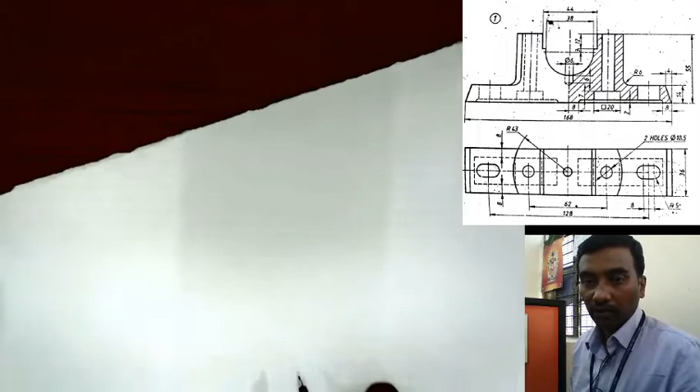This video is on assembly drawing of Plummer Block. Plummer Block is used to support bearings, and this demo covers drawing of Plummer Block parts and assembly drawing of Plummer Block.

Here I'm showing this picture of a main part of the Plummer Block, that is the body. Front view and top view of the body are shown here, with front view with right half in section, and the top view shown in this figure.

How do we do sketching of this assembly drawing? First we'll start with the question. The question is: front view with right half in section. It is not a complete section, it is front view with the right half in section, and then top view.

So it's a drawing of two views. Before you start drawing, plan how to proceed, because you will be using an A4 sheet, so this drawing should fit in the A4 sheet. Here side view is not asked, so I'm not drawing the side view.

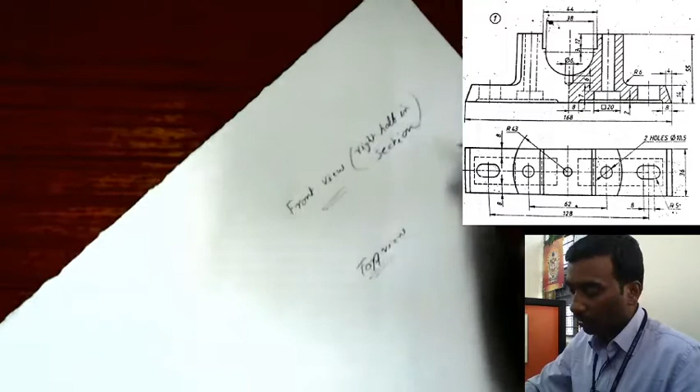If left view is asked, then you need to draw left view here. If right view is asked, then right view should come here. This is the format, so the drawing should fit in the A4 sheet.

Basically there are minimum three views that will be asked, but here for space constraint, I'm doing only these two: front view and top view. These two views will fit into the drawing sheet.

This is the sheet that you will be using. Front view and top view should come here, front view above and top view below the front view. So don't draw top view on the next page or like that. Please don't do that, because you need to follow the standard.

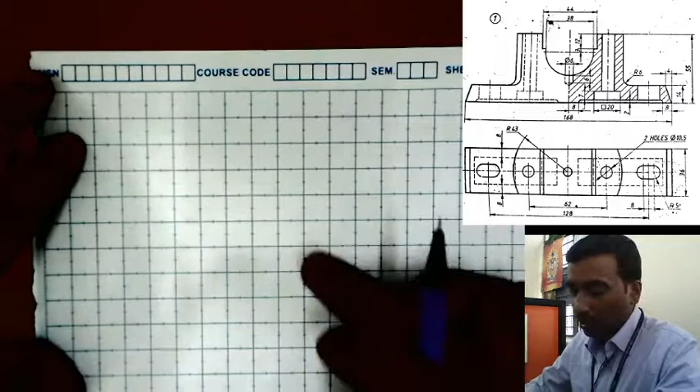This is orthographic projection. Front view, below front view is top view, and next to the front view should be the side view. So front view here, top view should come exactly below this, and side view on any of the sides.

If it comes here, then it will be left view, so right view should come here. This is the template, and you should follow this, the method of orthographic projection.

Here it is first angle projection, that's why top view comes here and the front view comes here. If it is third angle projection, then top view here, and below top view the front view. Here we are following first angle projection, so front view and the top view.

I need this much space, so please plan for the space so that it can be accommodated in the drawing sheet, and then proceed. I will leave this much space for front view, and the bottom portion of the sheet is for top view. What is the size of the complete assembly?

Complete assembly will be around 80 to 90 mm, so I can leave this much space, and width is around 170 mm, so 170 I can accommodate here. This drawing sheet's width is 180, so I can accommodate.

So top view here, and front view will come here. I will start with front view, front view with right half in section. This is the XY line. Or we can do like this also, that's also possible if the space is sufficient.

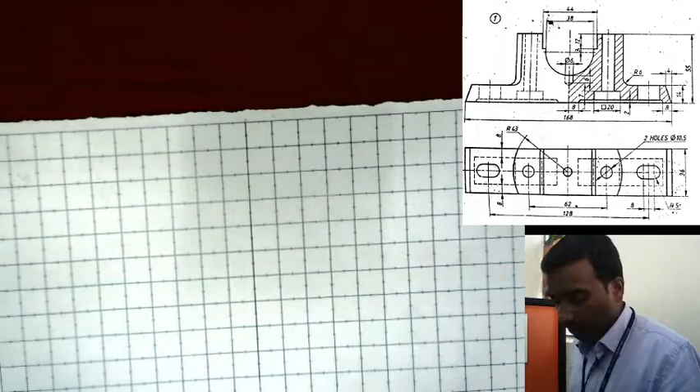The width is 40 mm, and this is okay, so let's do like this. Landscape orientation is also possible, because if side view is asked, then you should know how to draw the side view also - front view, top view, and side view.

I need this width of 170 mm, so I will take up to here. This is the XY line and baseline for the front view. So the thickness here is 14 mm.

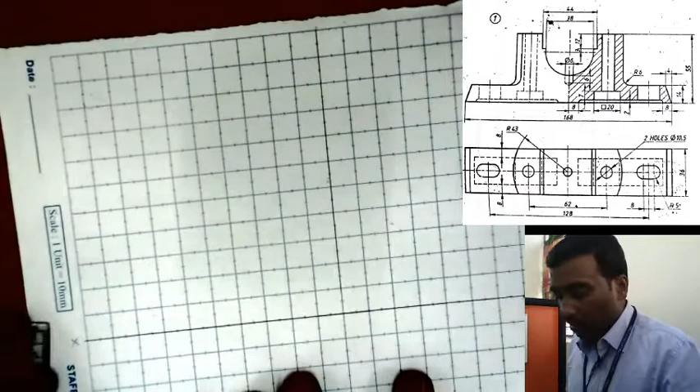I'm drawing to 1:1 scale, so whatever the dimension, I will take the same dimension. I will not reduce the dimension. It is 1:1 scale, so here it is 14 mm thickness, I take 14 mm.

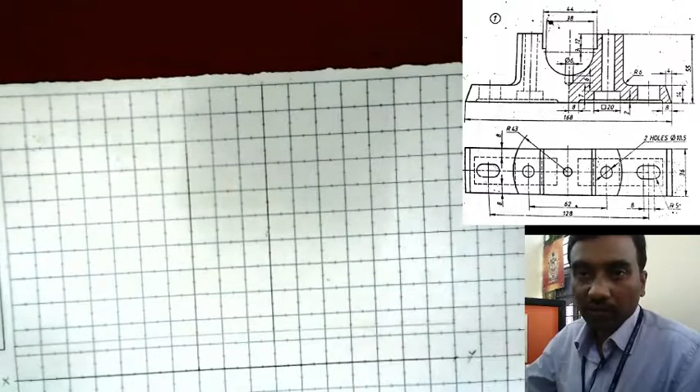Height is 55 mm, measuring 55 mm from the bottom line. So from here it is 55, so it comes here. So I will draw the arc. Instead of the radius, the diameter is given, diameter is 38, that means 19 mm, so radius is 19 mm. So this is the center.

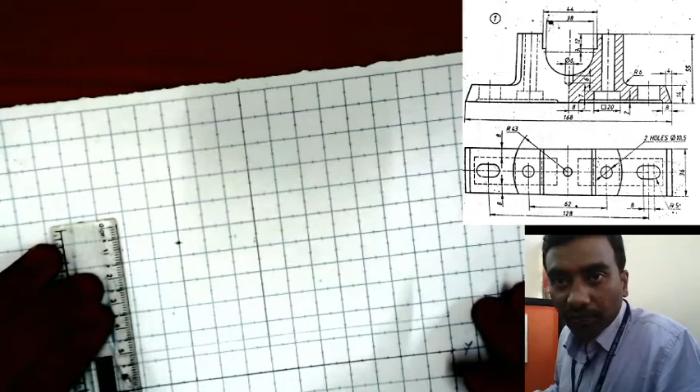Sorry, the height is 55. So this height is 55, from there I need to draw. I will take this reference, it is 22 on either side, and vertical height is 12 mm.

And then this is 38. 44 minus 38 is 6 mm, so this distance will be 3 mm. So total difference is 6, so on either side if I take, then it will be 3 mm. So it is 3 mm, 1, 2, 3. So on this side also is 3.

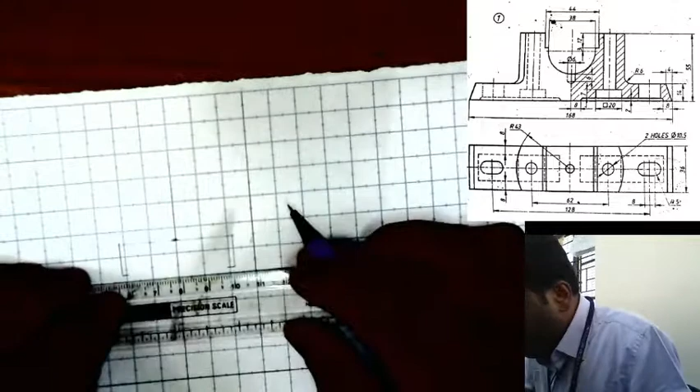So diameter is 38. Again I need to take 3 mm down, the distance of 3 mm from here. From here it is 19 mm.

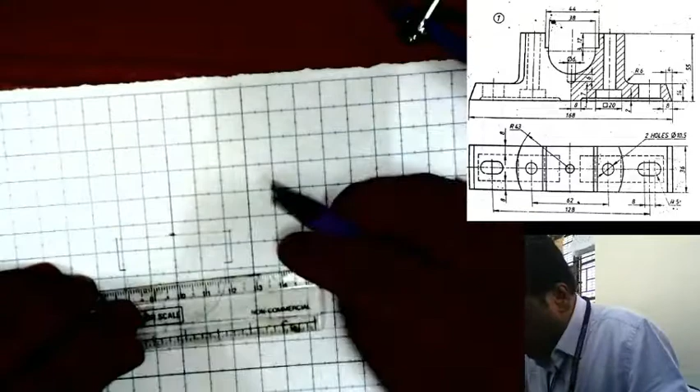Then a straight line connecting these points. So it is like this. I will make this arc darker.

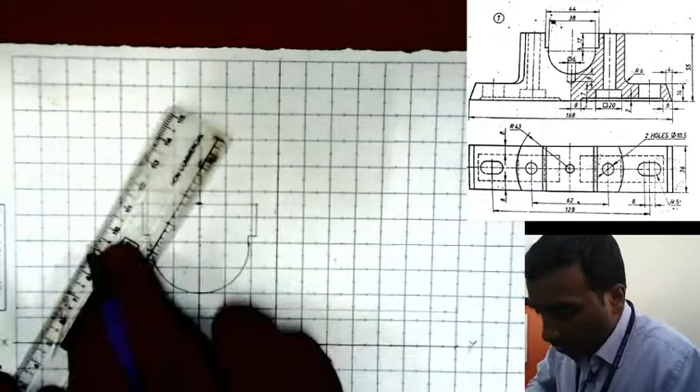So now at the end it is 4 mm from the top on either side. So taking 4 mm length on this side and also on this side, 4 mm, and join these two points.

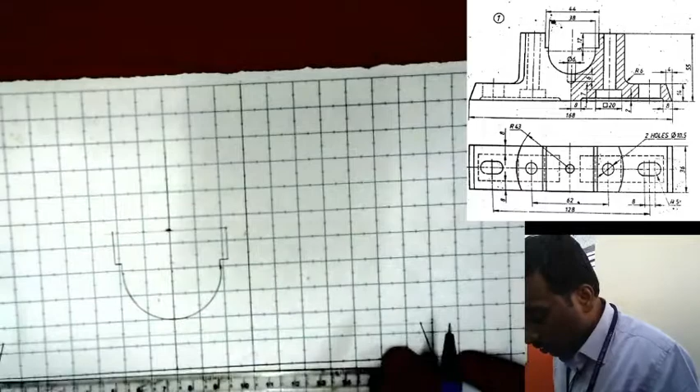So here it is going a little outside, so take care. It's okay, it's because it's difficult to complete in an A4 sheet. So total length is 168, so it is 84 from here, 84 mm here.

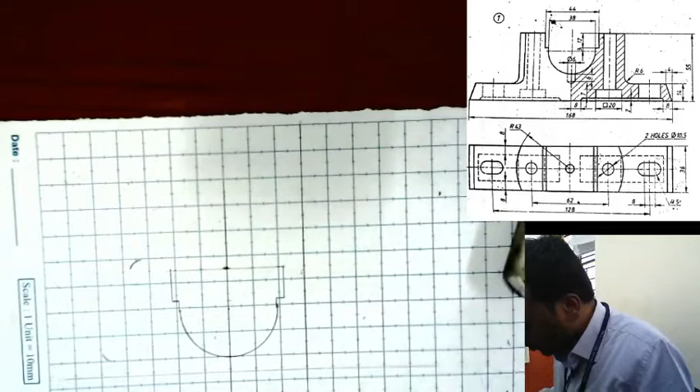So I will draw a vertical line, and from there it is 4 mm. So it is this line, and then from center it is 84 mm. So from top I will extend up to this, and from here I will take 4 mm.

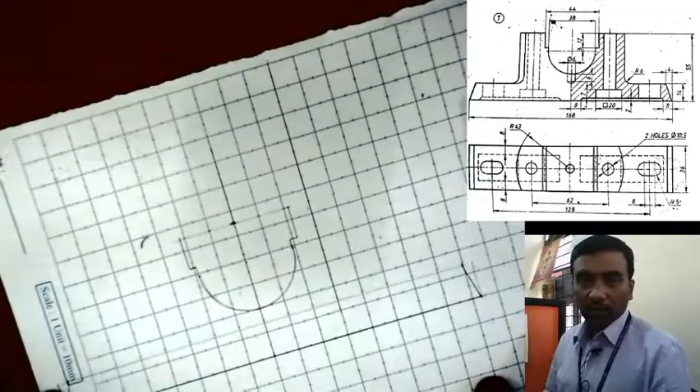So actually in the beginning I considered this distance as 170. So that's not correct, actually it is 168. And also, while taking dimension, I made a mistake here. Please correct, because this is a center line. From here, I need to take half, exactly half of 168 is 84, and 84 from this reference line. On this side it is 84, on this side it is 84. Okay.

So height is 14 mm, so height is 14, that is correct. So now I will take these dimensions from the top as a reference, because this is the reference line, I will take reference from here. So what is the distance from here to this last line? It is not given in the front view, it is given in the top view.

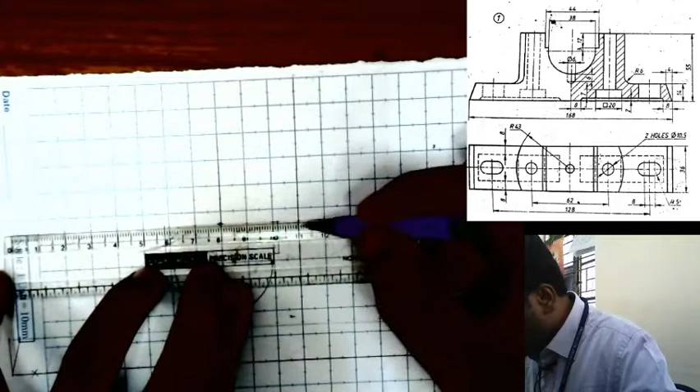So in the top view you can see that radius is 43, so it's an arc of radius 43 in the top view. So therefore this distance from here is 43, 10, 20, 30, 40, 43 is to here. From the center, it is to a length of 43, okay, 10, 20, 30, 40, 43 up to here.

And then from here I will draw a vertical line. Then I will make this dark, and then from here it is dark like this.

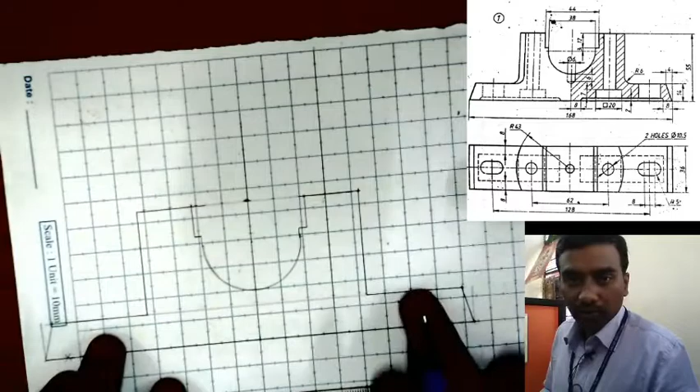Next, taking reference for the holes here, so that it is of width 10 mm and semicircular on either side. So it is at a distance of 128, that is, from the center it is 64. So I will measure the distance from here. It is 64, and again on this side it is 64, like this. So this is the axis for the hole, and here also axis for the hole is.

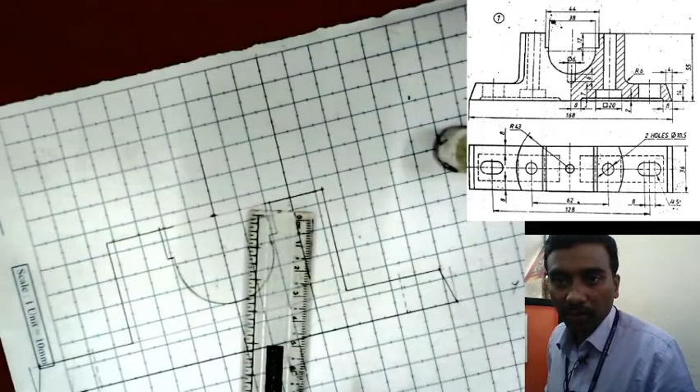The total width of the hole is 8 plus 10 mm, that is 5 on either side because of the arc, and 8 mm, so it is 10 plus 8, 18 mm. So I need to mark 9 mm on either side, so 9 mm here and 9 mm here.

So here I will show with the dotted line, because it is not visible. But here it is visible, because I'm showing from this side it is with section, so it is visible on this side. So 9 mm on either side, so 9 mm and 9 mm here.

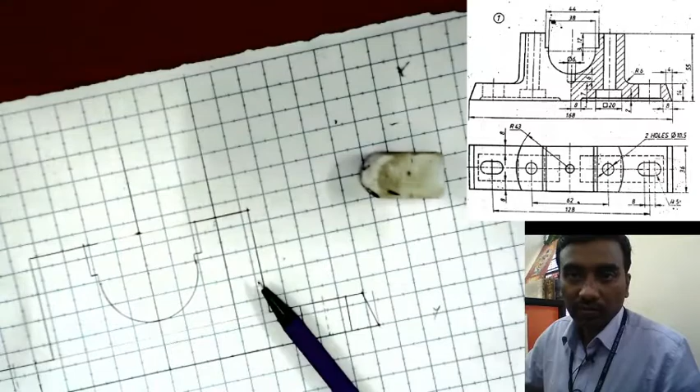But it is not complete. The vertical line below that is a slot. So a slot of, sorry not 7 mm, it is 2 mm. It's a 2 mm slot in the bottom face.

So on this side it is not visible because here I'm not showing section, so I have to show with the dotted line. So on this side I can show like this because it is a visible section view. Okay, so again here it is not complete throughout the section, and it is a distance of 8 mm.

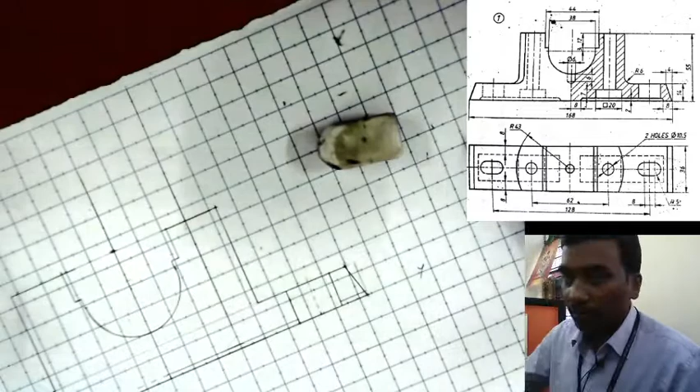So there is 8 mm from here, so 8 mm from bottom, 8 mm measuring from the bottom, okay, so 8 mm, here it is up to, okay, from the center also 8 mm.

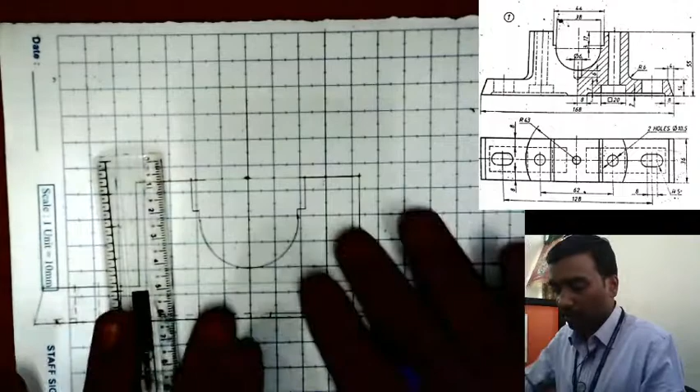So the view is like this. Since we are showing the front view with right half in section, this portion should come in section. This is without section. So right half in section, the right side of the observer - this is the right side. So right half in section, this portion I have to show in section.

So I need to show the inner details of the part on this side. There is space for a bolt here, which is at a distance of 31 mm from the center. So measuring 31 mm.

So the 31 mm here, I will draw the axis. This is the axis for the bolt hole, and then it is a square head bolt hole. So there is a square hole here, whose height is 7 mm, and its width is 20. That means from here it is 10 mm like this.

So I need not draw the dotted hole because this is visible. So it is like this.

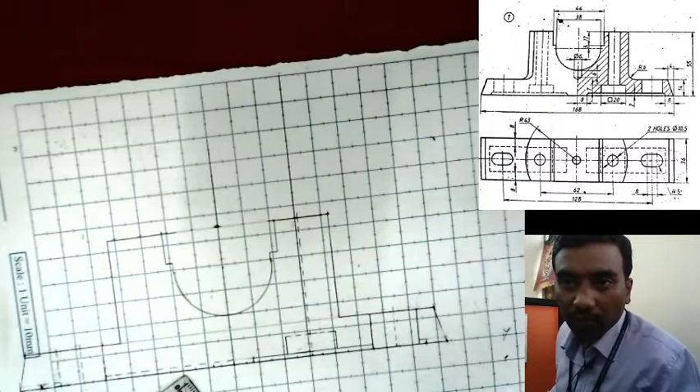The diameter of the bolt is 10.5 mm, so from here it is 5 mm on either side. I can't measure 0.5 mm, so I'm taking 10 mm. In software, you can draw actually the 10.5 diameter of the hole, but here the least count is 1 mm, so it is not possible.

I will make it approximate to 10 mm. So this is the space for the bolt. The bolt will come here. So it is like this. So try to draw exactly as it is, as per the dimension.

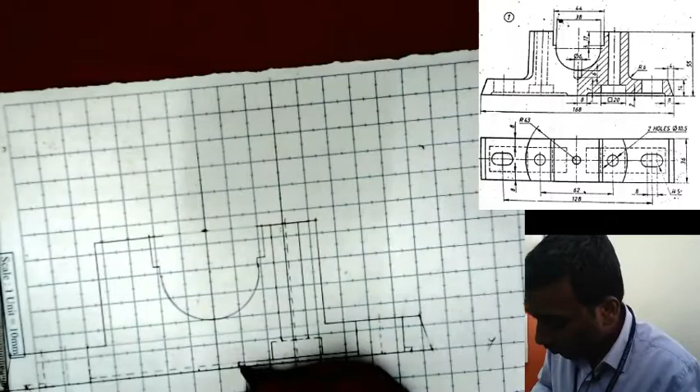It is mentioned that wherever the radius is not specified, unless otherwise specified, the radius is 1 mm, that is mentioned in the drawing. Also, these minute details you can just make it like this. So this is not actually completed, but major part of the body is completed here.

Now I need to assemble. Before that, let me draw this hole also. Diameter is 6 mm, so it is 3 mm and 3 mm, with a depth of 6 mm.

So here I will draw two dotted lines. Here I will show the continuous line for 6 mm, and then select this.

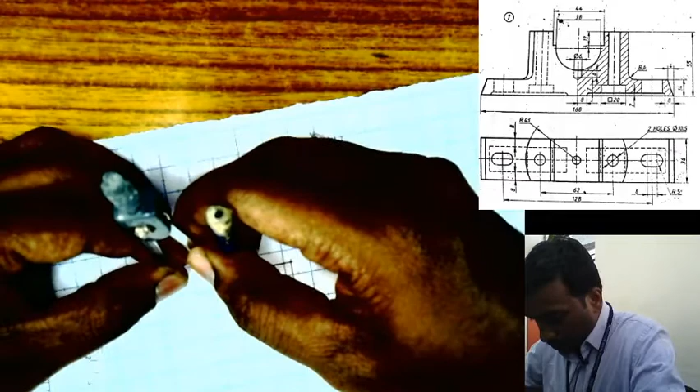The same - there is symmetry about this axis, so I will take this dimension on this side and this dimension on this side. So this is for the axis, and this is for the bolt.

This is the square head of the bolt.

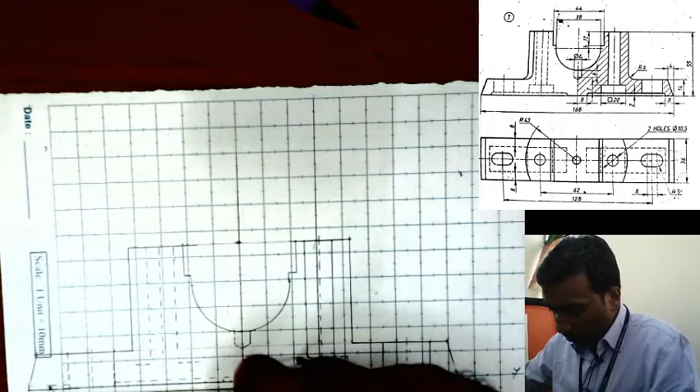I'll take measurement from here. This way we can save time. Since it is symmetry about this axis, I can just measure and copy this dimension on this side, so we can save time.

So now part number 2, I will add that image.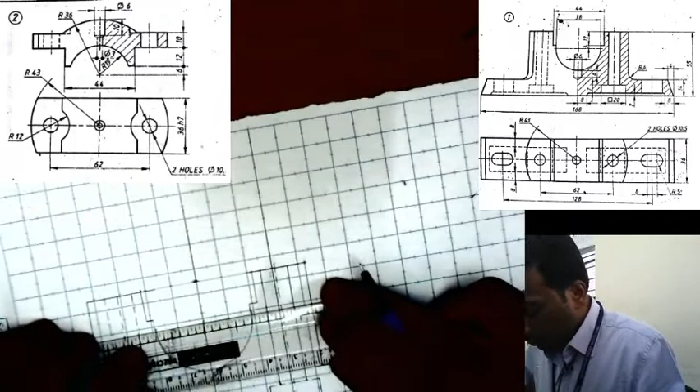So now the cap - the center is actually the same as the center of the body, they should coincide. From here, the radius is 19, so I will draw an arc of radius 19.

So this is just for reference, but actually the bearing bottom half and bearing top half will cover this portion.

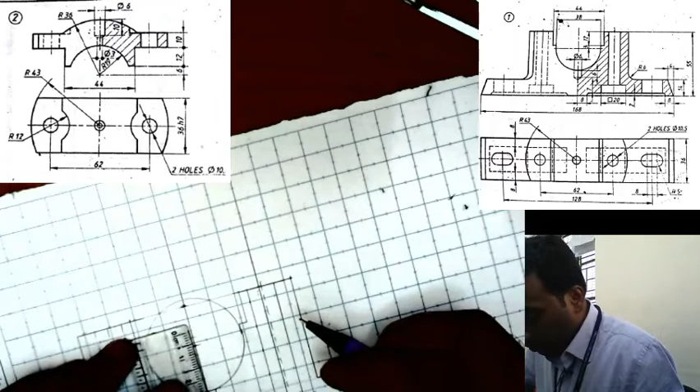So now from the center, I have to take a distance, height of 6 mm. From here, the height is up to here.

Forty-four is the width, so I'll take 22, which will touch this much portion. And then this vertical distance is 12 mm, from here it is 12 mm distance. So like this.

And then from there, it is to a distance of 43, which means it is up to this line. And then 10 mm from here.

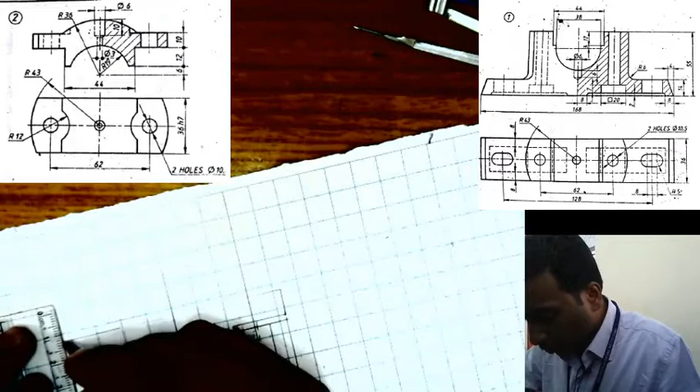So like this. So one more arc of radius 36.

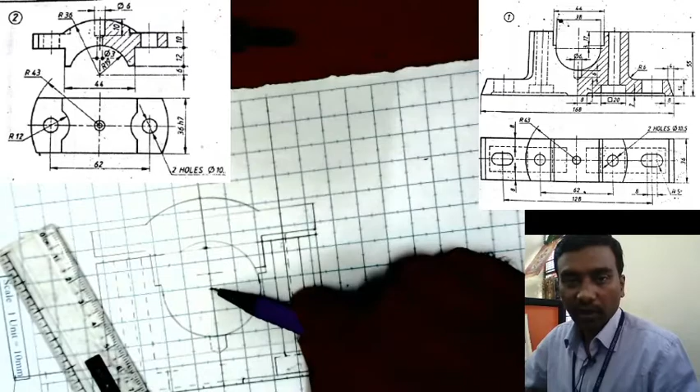Remember, the constraint here is this is the body and this is the cap. After the body, the bearing bottom half will be inserted, then the shaft will come, then bearing top half, and then the cap. Since I am getting the reference as the center of the body and center of the cap, I'm just taking that reference and inserting the cap. In actual procedure, they will insert the bearing bottom half on the body aligned with this axis, then the shaft, then bearing top half, and then the cap will be inserted.

So now take the projection. I will complete this part. Just a minute.

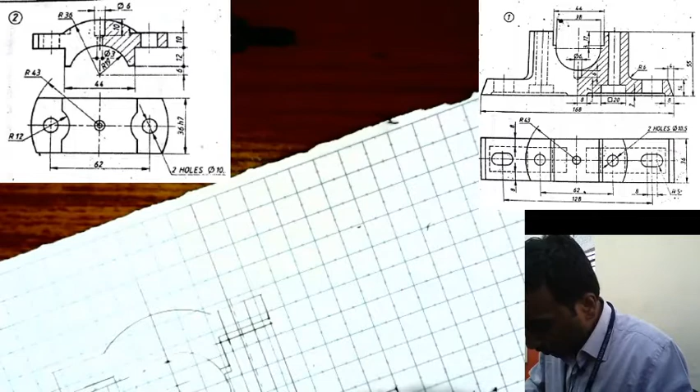So the axis, here this hole is also visible. That bolt will come here. I will just extend this because it is the bolt. This is the bolt, so I will show the bolt head. This will become a continuous line, this also becomes a continuous line, and then I can erase this. No, this is not required because the bolt view comes here. So it is like this.

So length of the bolt is... length of the bolt, I will add that image.

So length of the bolt is 75 mm. Shank length is 75 mm, it's measured from here. It should be 75. I think it is 75. It seems to be 75. Okay, 75 mm comes up to here.

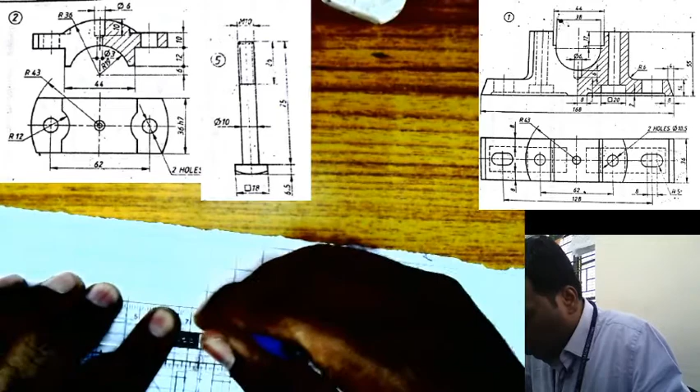So two nuts will come here to clamp this assembly. Two bolts and four nuts.

Similarly here I will show the bolt. So bolt is visible in this gap, and it is up to this length.

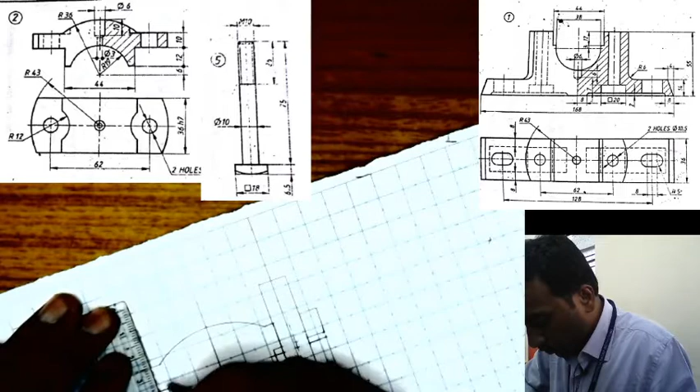Now I will take this bearing bottom half. Before that, let me draw these oil holes. It is at the center, and diameter is 6 mm, so from here 3 mm on either side, to a depth of 10 mm. And then the diameter is reduced to 3 mm, so 1.5 on either side.

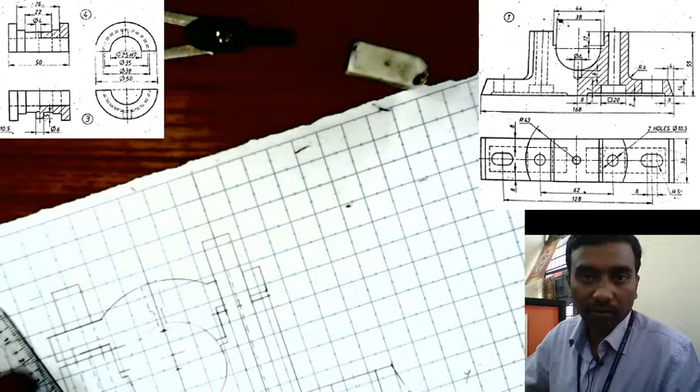Now I will include the bearing bottom half and top half. Here it will be seen as this circle. The diameter of the circle is 50 mm, which coincides with the axis of this bearing bottom half and top half, it coincides with this center. So it is 25 mm is the radius.

Taking the radius here, I will draw a horizontal line for reference, and then comes 38 mm, which is already there. Okay, and then one more arc of 35, that is 17.5.

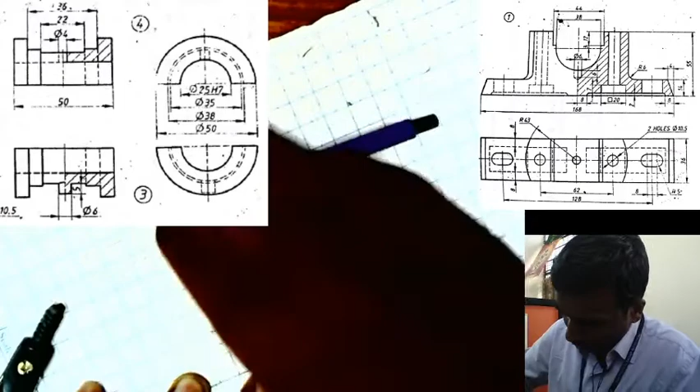So now the next part is the shaft, so I need to know the diameter of the shaft and nut. So it is 25 mm, diameter of the shaft is 25 mm. Just take 12.5.

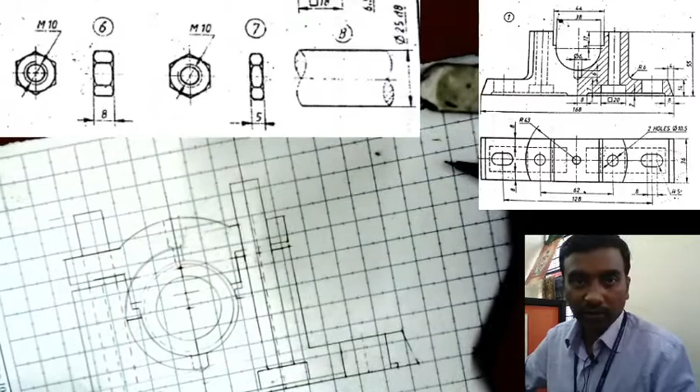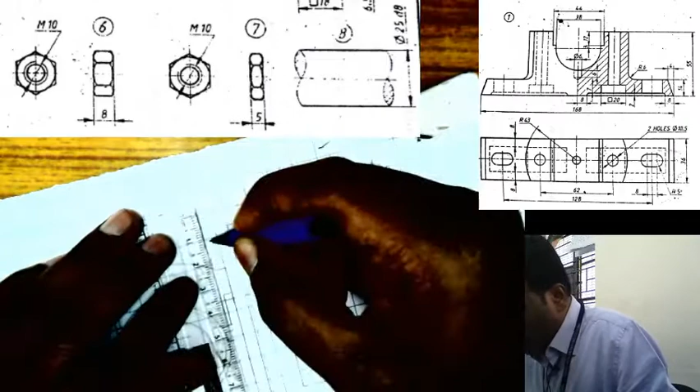Now the nut and lock nut. The small one's thickness is 5 mm, is 5 mm is the thickness, we'll take thickness is... then the bigger one is of thickness 8 mm.

So it is, show the chamfers. Actually you should follow the procedure given in the nut and bolt chapter to draw this, but here, because of time constraint, you can show like this.

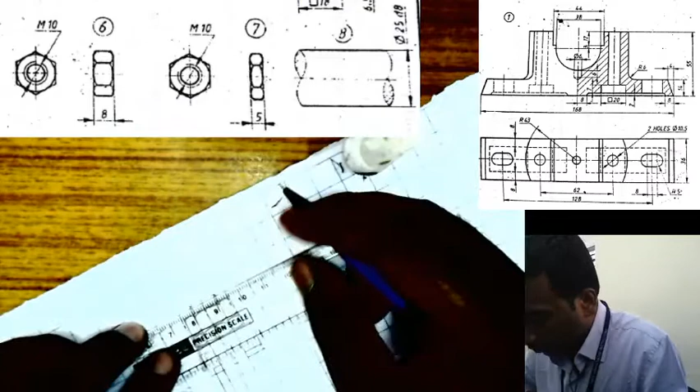Show threadings because this portion is threaded, so show threadings here with the chamfer, and here also with the threading and chamfer. I will draw this first, 5 mm and then for 8 mm.

So for details about the nut, please refer to the nut and bolt chapter. There you will get the actual procedure to draw the views of the nut and bolt.

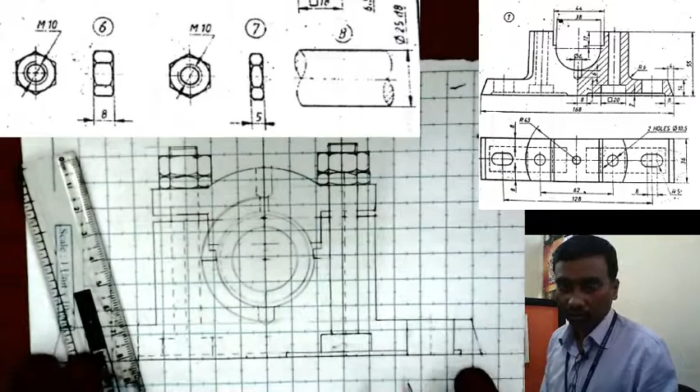Since the right side is the sectional view, you should show the section. So for the section view, you should draw the lines showing the section. It should be at 45 degrees, like this. You need to fill this area which represents the section.

Don't hatch the nut and bolt. This I should not hatch.

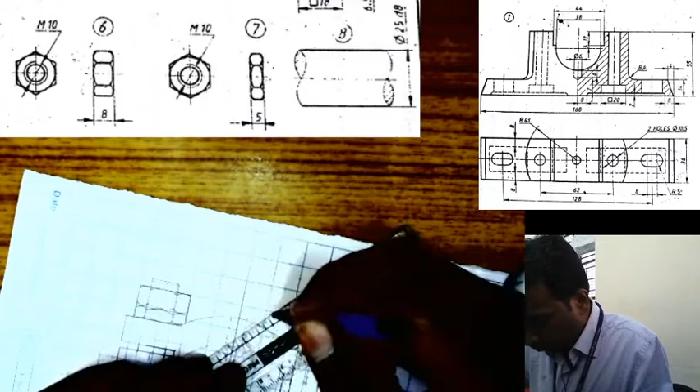Hatching style should not be the same for these two, they are different parts. So hatching style here I'm showing like this, but for this it should differ because these two are different parts.

So this is actually the major part of the front view completed here, and I will not go further because you can complete that remaining part. Ballooning, showing major dimensions, other things, you please do it.

Now the top view of this assembly, so the top view of the assembly is like this here. So the total distance, this 36 is the width of the... 36 mm, so I will take 36 mm.

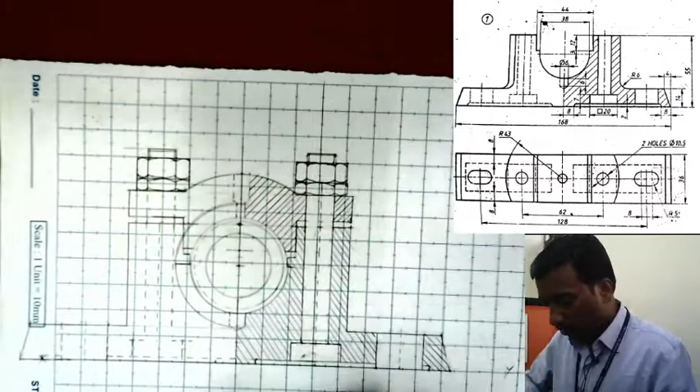This is the reference line. So for the top view we'll take projection from here, from these two ends, like this. So width is 36, 18 mm on either side, and 18 mm on this side.

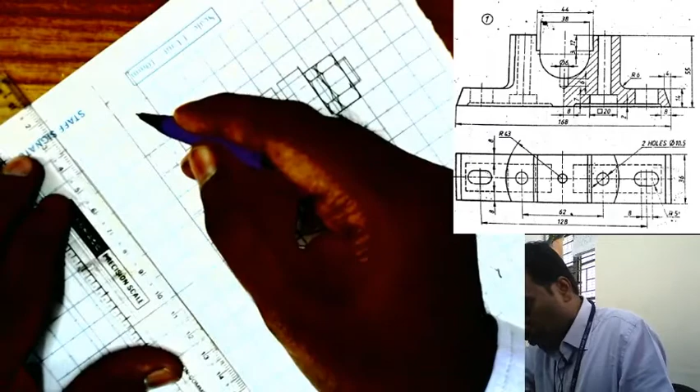So center is this portion here. From there I will need to take the arc of radius 43. We'll draw this arc on this side, similarly an arc on this side.

Now I'll take the projection of this to the front view, and here I need to show the dotted line. And then an arc will come here of radius 6. For that, use pro circle, use pro circle and draw the arcs, this arc.

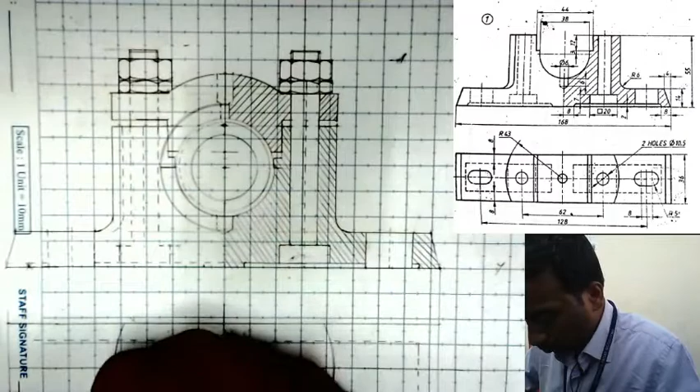So then the bolt and nut. Please use Pro Circle for these small curves and circles, because it takes too much time if you want to do it by using a compass. Also, you will not get a good curve because it's a small curve, so you can use Pro Circles.

So this is the top view of the bolt, and for the nut, top view of the nut, and then on this side.

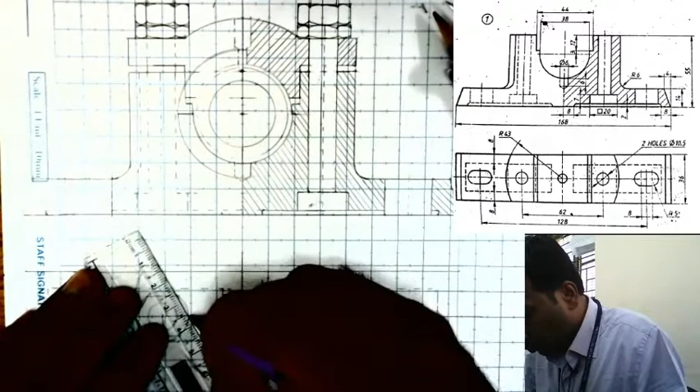So show the top view of the nuts like this. Here comes after this, the top view of the cap. So top view of the cap is like this. It coincides with this line, so it will overlap on this edge. It's okay, but the oil hole will come here. We need to show the oil holes here. Please use Pro Circle.

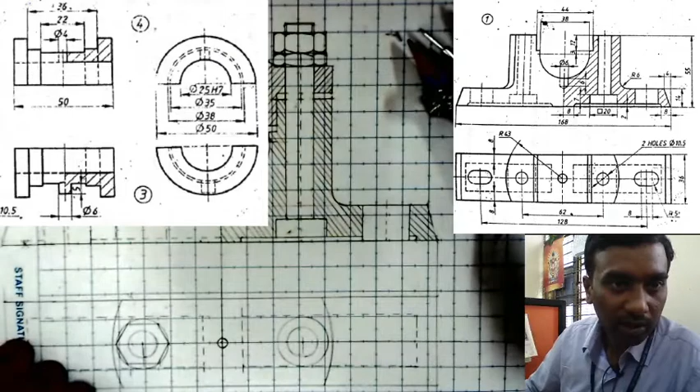So bearing top half and bearing bottom half, this will fit here, 36 mm will fit here. The remaining will project out, and its distance is 50 minus 36 is 14, and 7 mm outside. We will take this projection outside. It projects out by 7 mm on this side, on either side it is 7 mm. So here it measures 7 mm outside, 7 mm here and 7 mm.

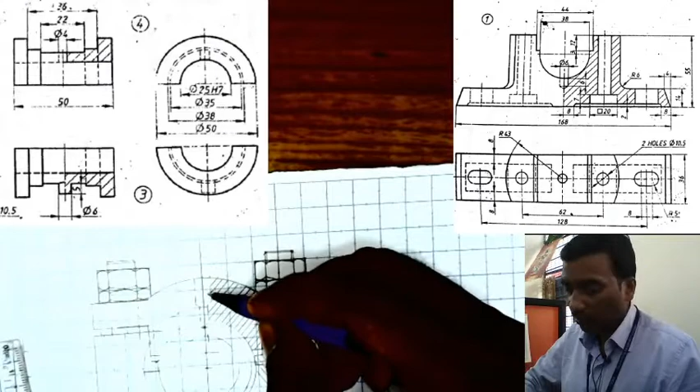So like this, then the shaft will project out. I mean, it is the support for the shaft. So this is a bearing and it supports the shaft. Bearing bottom half and bearing top half will hold the shaft in position, and with the cap the entire assembly is held by the bolts, by clamping them. And this way, this is for oil holes, so with this oil will flow and provide lubrication for the smooth rotation of the shaft.

So this is what completes this. So shaft, bearing bottom half, top half, and the cap, and the entire assembly like this. I have not drawn this view, please draw it, it is just like this. So like this it comes here.

And if the side view is to be drawn, then we need to take the projection here. So I will draw the reference lines for the side view. This is the intersection point of the XY line. From here I will draw a 45-degree line. So now you need to take the projection of this. The side view should come here. So this is the left view, because I'm the observer.

I'm looking at this drawing from this end. So this is the left side of the observer. This will be the left side of the observer. So if you're viewing in this direction, the view will come here, so the view is the left view. So take the projection of this, and projection of this, taking projection here.

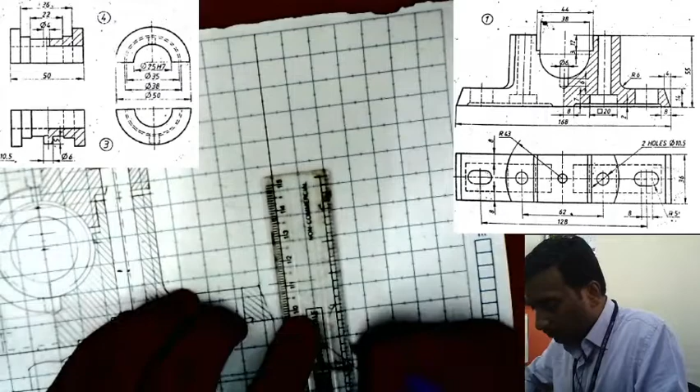We can take the projection of the front view and projection from the top view and complete the side view here. So, left view, this is the procedure.

So front view, the front view will be like this, it will be front view with the right half in section. Take care about this gap here and also this gap. If you maintain proper dimensions, then you will get this gap.

Similarly, this top view, so the top view is a bit easier. You need to show the bearing, the projection of the bearing top half and bottom half, and the shaft. And then the section view is also important here.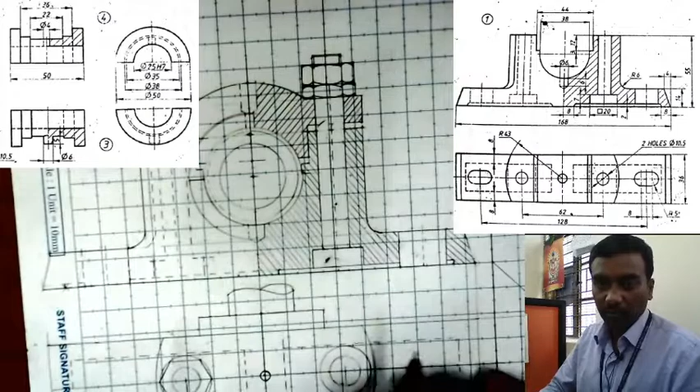See, this is the front view with right half in section, that means 1/4 of the part, 1/4 of the assembly is removed. When it is removed, you will get the view like this. So the section plane will come like this.

So showing 1/4 of the assembly is removed, and the details will be shown like this. So the section plane will pass through the assembly like this. This is the section plane. So you need to take this area, and when it is viewed like this.

So I have not shown the dimensions, you please show the dimensions and complete this assembly. So this is the procedure for drawing the Plummer Block assembly.